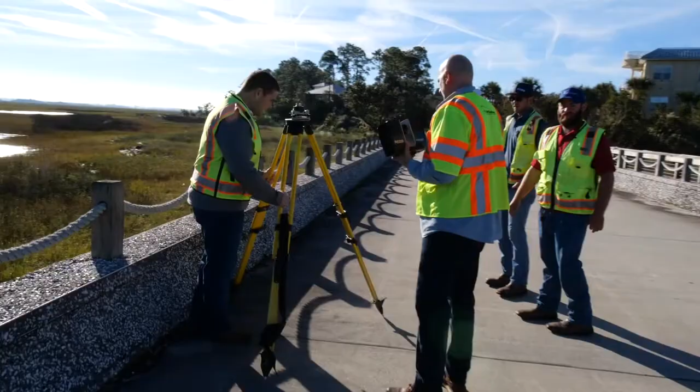One of the things that has made Kennedy Surveying different than most other survey firms in our region, at least in North Florida, has been our dedication to accuracy. You know, I don't say that lightheartedly. We put a lot of dedication into ensuring our work meets the standards that we portray to our client for a specific project.

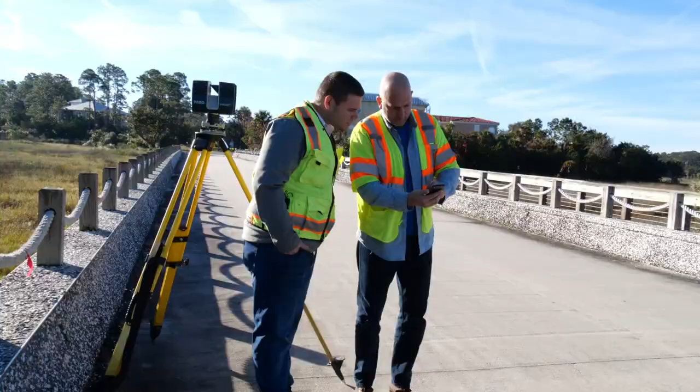I think what set Kennedy apart from my perspective was his singular focus on accuracy. And you don't think about it much as a real estate developer. But once you find out that what you have is garbage and you can't work with it, then you realize how important accuracy is.

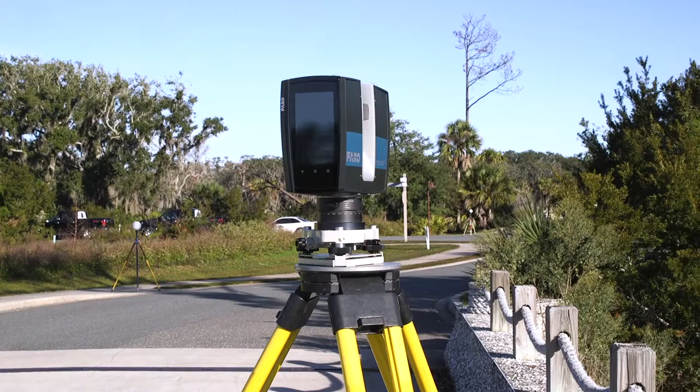The biggest thing that brought us and led us into doing the 3D scanners was we were getting to a point that it was taking quite a bit of time to provide the data doing the conventional survey methods. When we contacted FARO, my father was very skeptical to really break into this 3D scanning market. His conventional survey methods of the past were a very tried and true method.

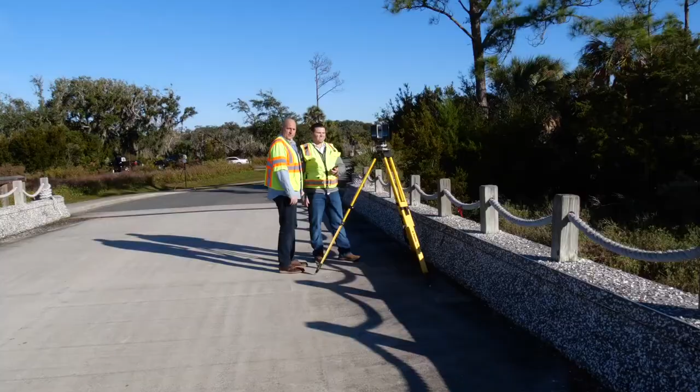So upon getting that scanner, we did some demonstrations with FARO. By FARO dedicating to send a sales engineer with a survey civil background out to us when we did the demonstration, he kind of gave us that leading edge to understand where to set the scanner up in certain positions to accurately collect the data that we were after.

We also spent a lot of time in the office to really hammer down the civil workflow of providing civil survey maps and as-built products to our clients. And during this time that we did this demonstration, we were not only trying to learn about the 3D scanners, we were proving the accuracy residuals that FARO stated that the scanner was capable of.

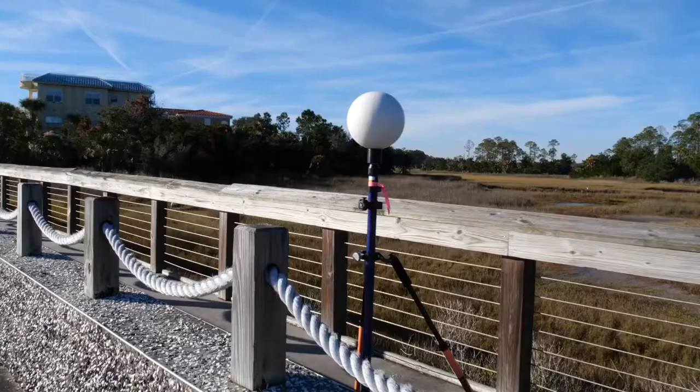After we did this demonstration set, I had my survey crews go back and survey some conventional survey sets. What we came to discover was that the scanner was very, very precise. I was really skeptical when we first demoed the scanner. I pushed the guys to the limits. I will not purchase any new technology without knowing that it works. We found out that it's just as accurate as the conventional equipment that we use every day.

To give you a prime example, we set the scanner up on a bridge structure and we're able to see a roadway 300 feet down the road. And I had my survey crews go back and take some topographical survey shots on this asphalt pavement roadway and compared them to the data set of the 3D point cloud.

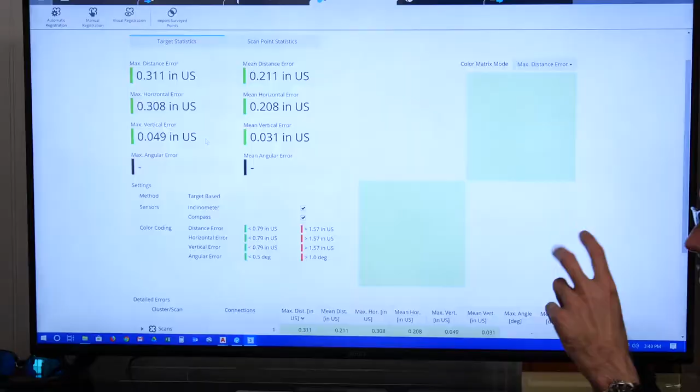And we were blown away that 300 feet away from that scan position, we were seeing accuracies under 1/8 of an inch. And we've been 60 projects in, and not once have we found out that the 3D FARO scanner has been wrong at any point in time. The results are more accurate, more precise than we can even provide with conventional survey methods.

Oyster Bay is about a 900-acre project. About 350 is buildable land, and we've carved out about 212 single-family large lots down here, and on the north end some tighter density single-family lots.

One of the problems that we encountered was we came out here where we were laying out our yacht club, and as we were working off of our original surveyor in the field, we found that nothing matched up. Everything in this project was designed around the trees. And you can see there's massive oaks and wonderful trees to work with here. And when we started designing the roads, they didn't fit.

So we ended up bringing in Wes Kennedy and Kennedy Surveying Firm to come in and look at what was wrong. And we found a number of problems, and they were able to tighten up the survey data to the point that we were able to get accurate construction information to finish the project.

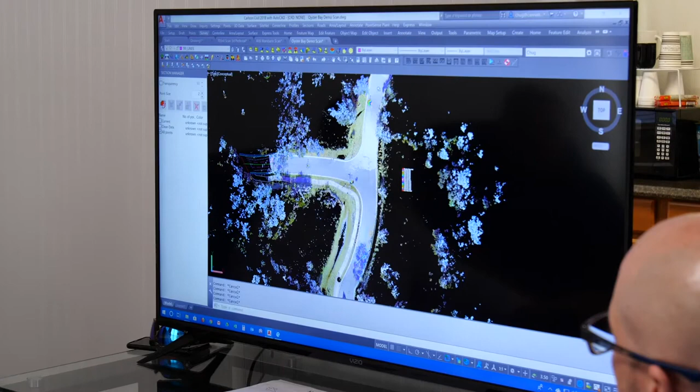The main reason we needed Kennedy here is we needed survey accuracy. When you're designing a project around thousands of trees and they're all in a CAD system and you're designing the roads and the buildings and the lot lines and the stormwater ponds around those trees, when they're in the wrong place, your designs are worthless.

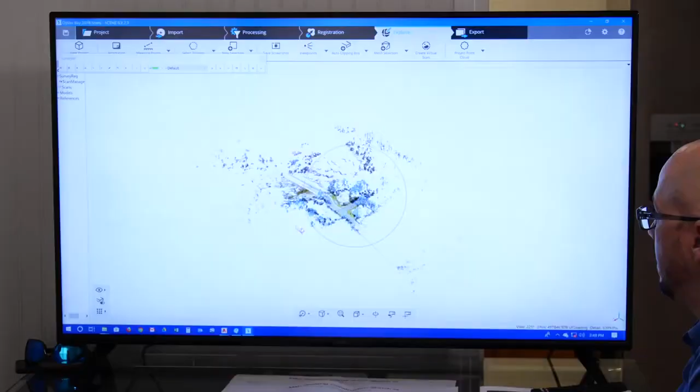Yeah, I think the major difference that we saw with the work that Wes was giving us when we're working in AutoCAD: our old surveyor was giving us several hundred points, and we were trying to extrapolate that data. But when Wes started coming on board and bringing us data, we were getting millions of data points from Wes in AutoCAD, and that enabled us to really tighten up the design, get the roads and the lot lines and the pond systems exactly where they needed to be, referencing the trees that we were working around.

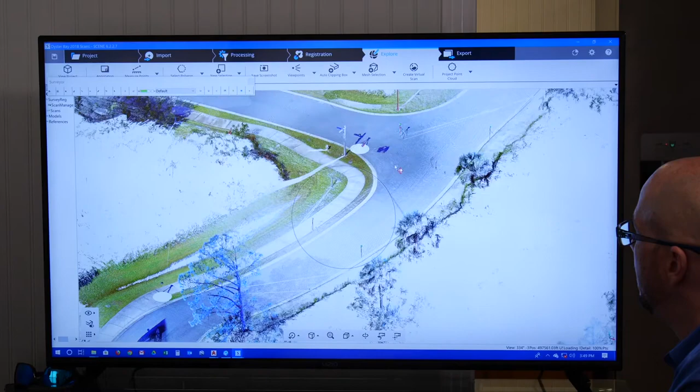So the most important thing that we had from Wes was accuracy, and I didn't have that from the previous surveyor, and it made all the difference in the world. It ended up saving me hundreds and hundreds of hours.

It's given us a great avenue to be able to bid projects cheaper, to be able to have the time on the projects really cut down, and it's just been a great tool to add to our repertoire to really lead us into the future of land surveying.